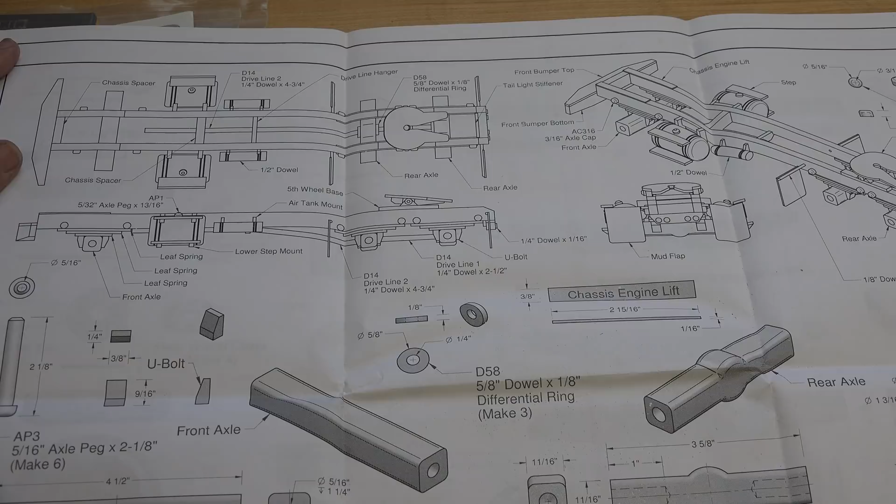Where last week we left off making those leaf springs, let's look at what we need to make now in order to be able to mount them to the frame. The way these drawings work, you really have to pay attention to what goes where and think about the process you're going to take in order to mount everything.

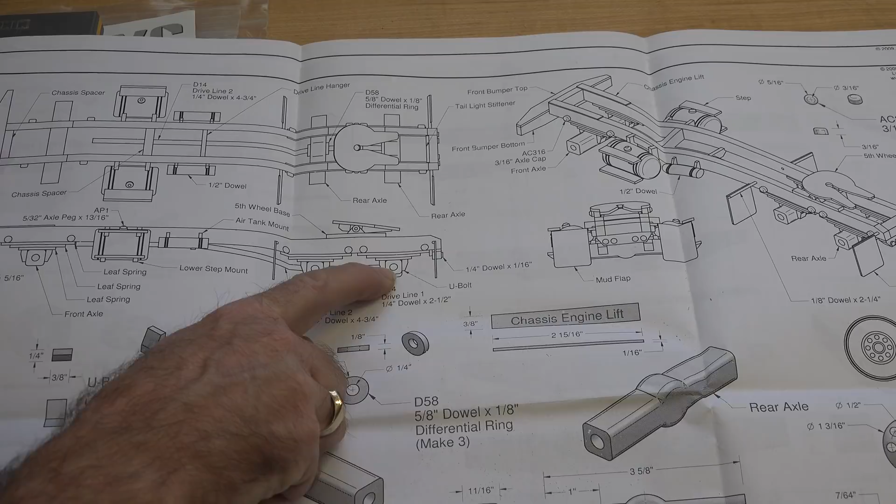We can see here our leaf springs here and here. It also shows them in another drawing over here. But we need to look at what connects everything together. Our leaf springs are glued to our frame, and our axles here are glued to our leaf springs.

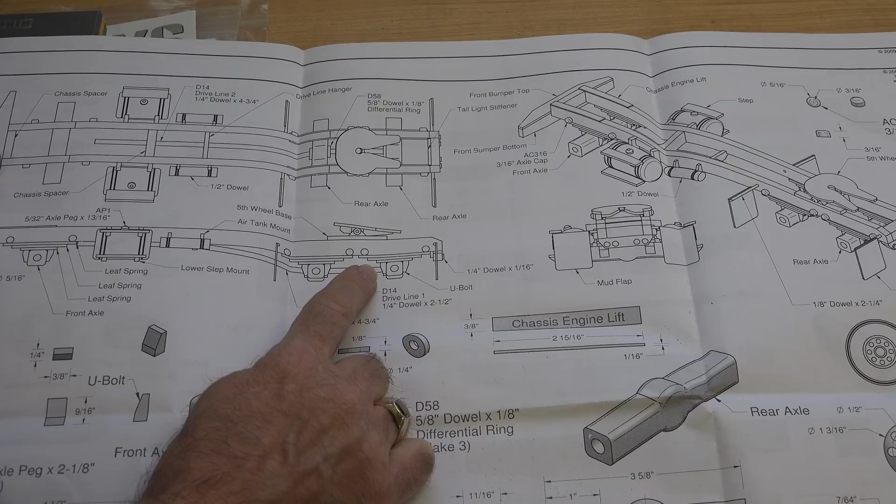In between our axles we have the drive lines, both the one between the two rear axles and the one that goes forward to the transmission. These drive lines are installed using our differential rings, so they will get mounted onto our rear axles. Now you see where everything is connecting here.

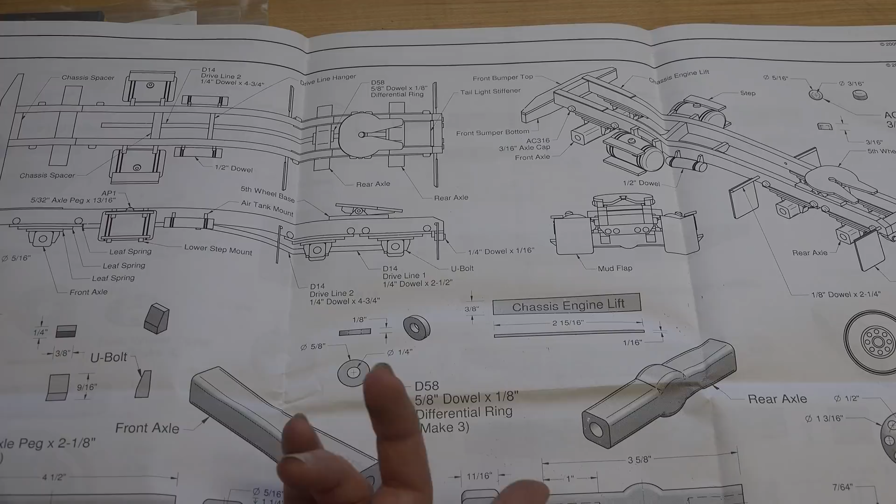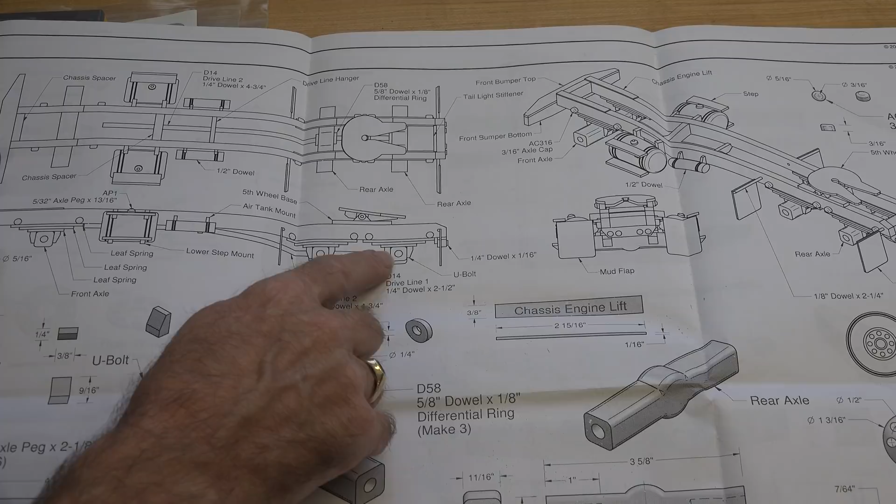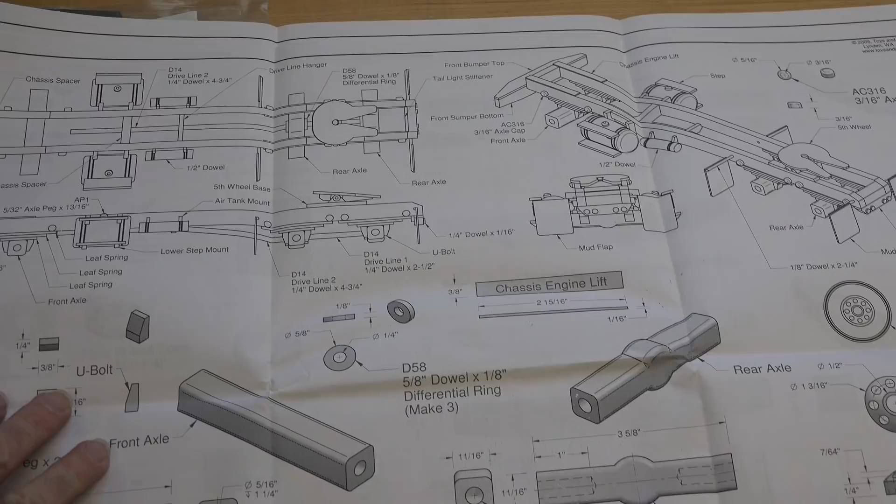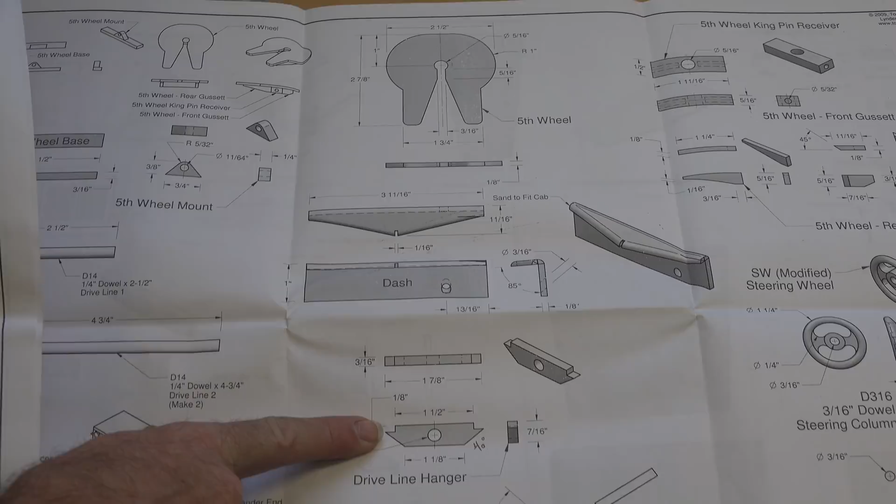If you were to just glue in all these pieces, you might have trouble getting in the drive line too. Even though you can't see it along this drawing, if you look up here's our front drive shaft that would go to our transmission, presumably over here. Right here is our driveline hanger, which we'll also need to get this driveline mounted in. That, when you flip through, is actually 2 more pages ahead right here with the driveline hanger.

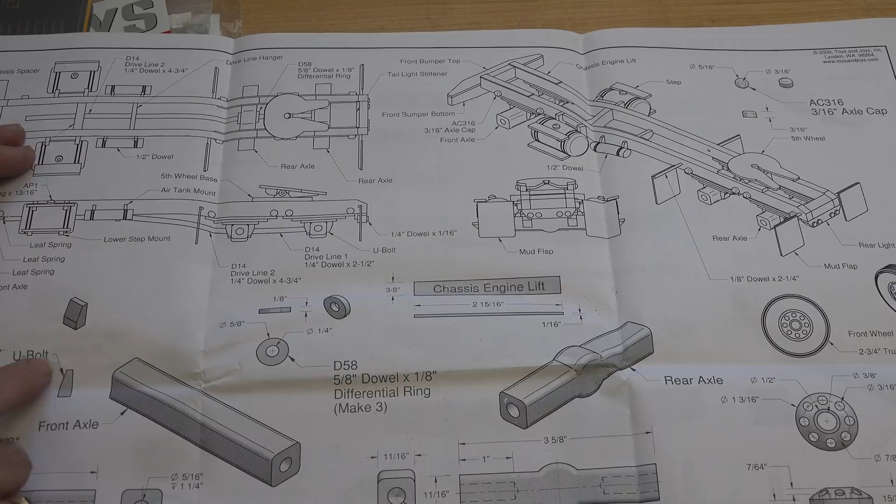So what we're going to need to make is the driveline hanger. We're going to need our 1/4 inch dowels for our drive lines and our driveline number 2 up here. We're going to need to make these U-bolts over here, which gets a little tricky, and I'll show you how to do that when we get there—the only tricky part is because they're so small. And we need to make these differential rings.

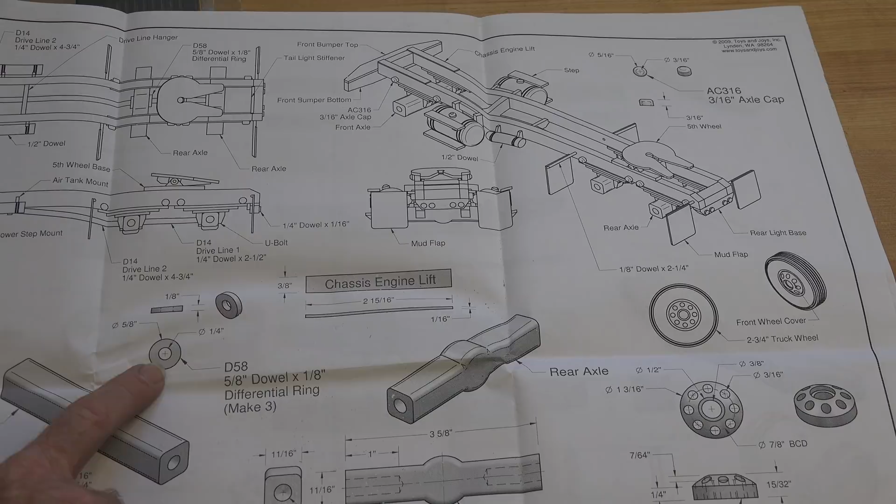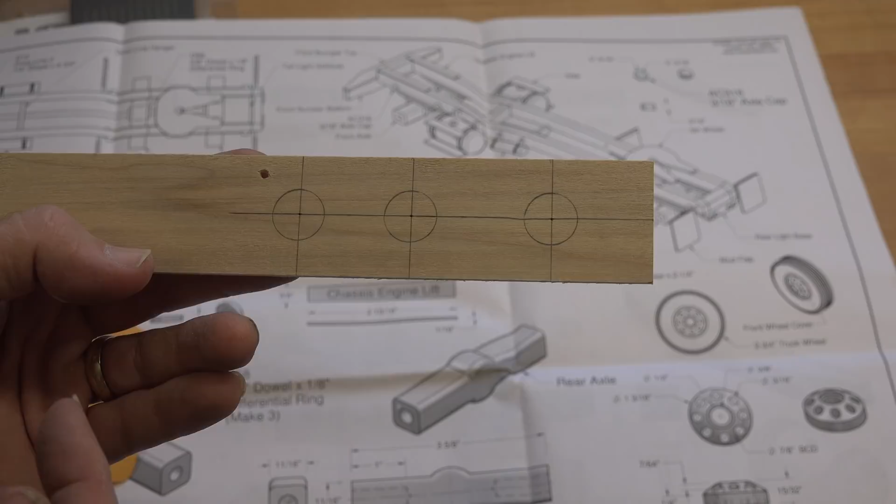So let's start off by making these differential rings. These pieces aren't rocket science. I've drawn out some crosshairs, used the circle template to draw a 5/8 outer diameter, and center punched the dead center of these crosshairs, and I'm going to drill a 1/4 inch hole as it says on the drawing. Then I'm going to cut the outer diameter on the scroll saw—I know it won't be perfect, so I'll cut just outside the line. Then we're going to do something to fix it up, and I'll show you that right now.

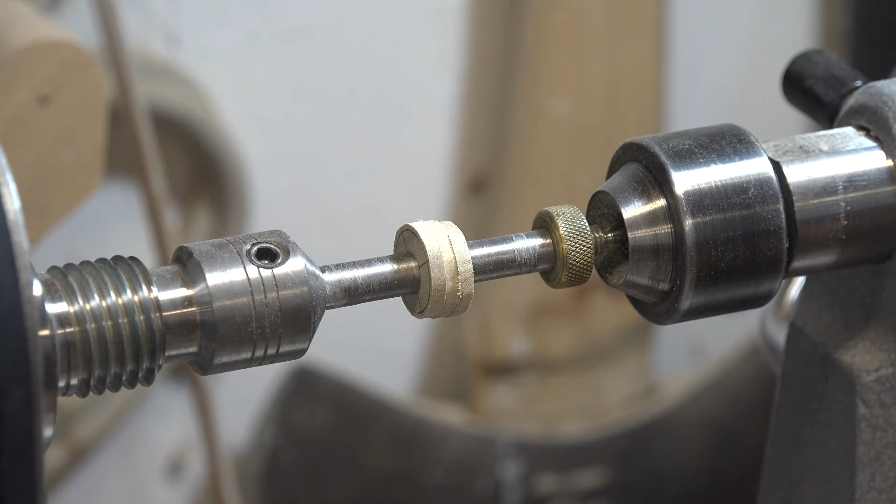We've got the 3 pieces rough cut, and isn't it convenient that that 1/4 inch hole in the middle also coincides with the diameter of my pen mandrel for my lathe. So we've chucked them all up here in the lathe, and all I'm going to do is take a piece of sandpaper, mount it to a little square block of MDF, and gently sand this square to the edges until I reach my 5/8 diameter. Now, if you don't have a lathe, don't fret, because a 1/4 inch dowel chucked up in your cordless drill will do the exact same thing. I just use this because it's what I have and what I like to do. So let's get these shaped down to our 5/8 of an inch.

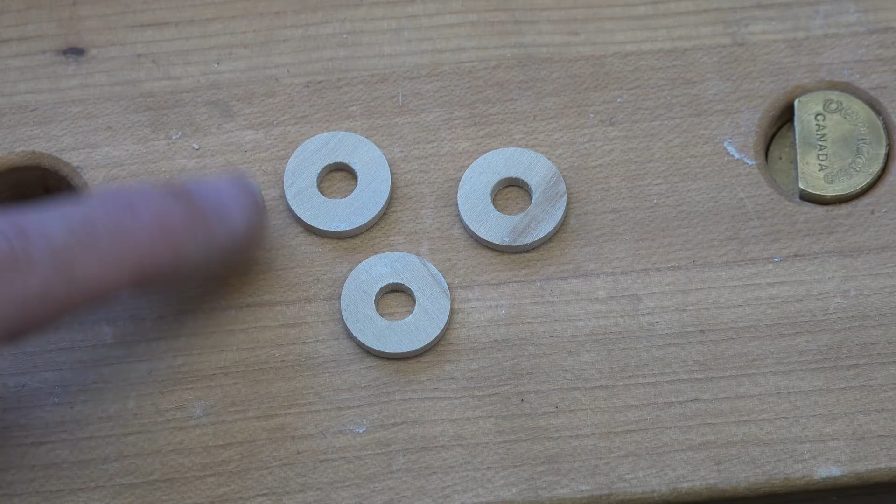And in no time at all, we have those 3 differential rings made, and you can see how nicely centered those 1/4 inch holes are. That's because that became the center which we spun them on the lathe and sanded them down to size. You'd get the same results with a cordless drill or even a drill press, guys. So those 3 parts are now made.

And we can now move forward, and I think we're going to make that drive shaft mount that was a couple pages ahead. And there we have the driveline hanger made, and you can see it's quite a small piece, and there's no kind of magic going on as to how to make this—it's just careful marking on your stock.

For this, I cut this particular dimension, the width of the piece, which is 7/16 of an inch, on the table saw using push pads, etc. And the rest of it is cut on a scroll saw.

Drill the hole in the middle with a 1/4 inch brad point drill bit while the stock is still square, to make sure you have plenty of original stock to work with and you're not trying to drill into this tiny little piece. And that's it, guys.

It's not rocket science, it's just a different method of making these pieces. Just take your time and everything works out just fine. If you're not that good on a scroll saw and you can't get that sharp edge, no problem. Cut outside the line and use that sandpaper mounted to the 3/4 inch MDF, and sand up to the line to square everything off and make it nice and straight. And Incra T rules, which you guys have seen featured on my show on more than one occasion, are really your best buddy when marking this sort of stuff out.

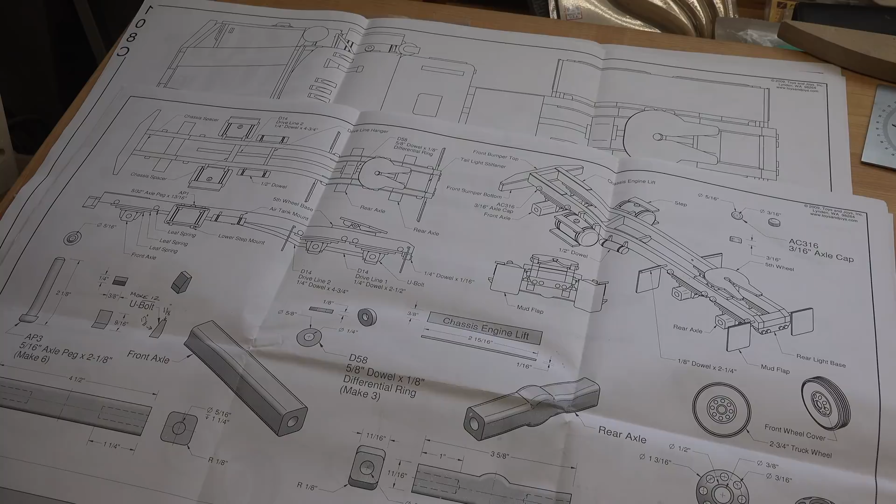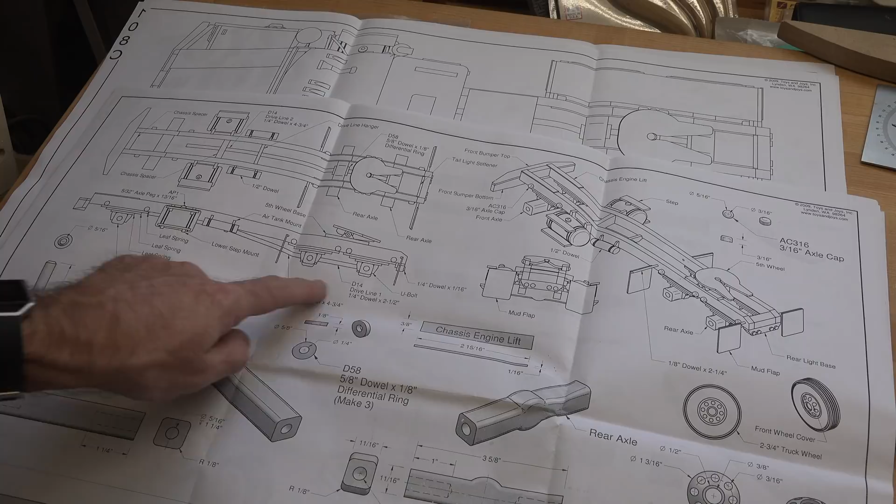Here is the problem. As I said in part 1, I have never seen one of these plans yet where things or measurements were not missing, but I've always been able to figure it out, and this one is no exception. Showing the position of the axles here, they show them over here, they show them up here. You can see the leaf springs right here, and then there's a gap between them, but nowhere in any page of these plans can I find any measurements as to where to mount these or where to mount the front ones. So now we're going to get into a bit of confusion.

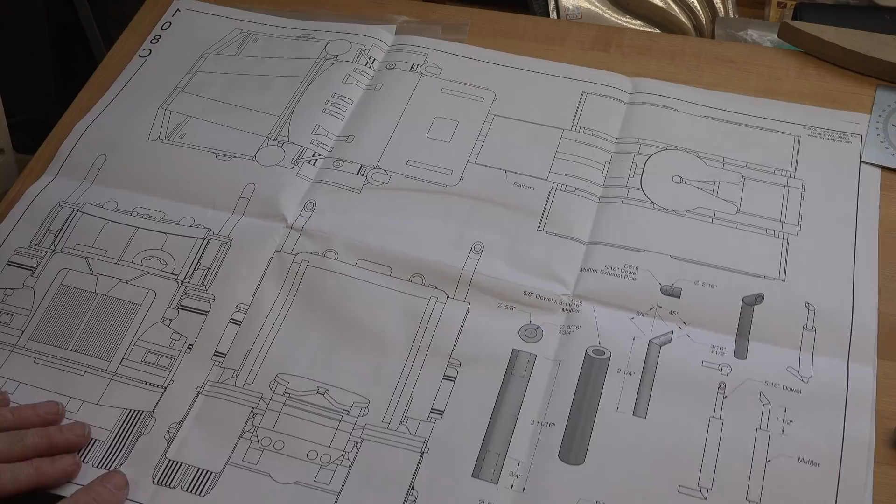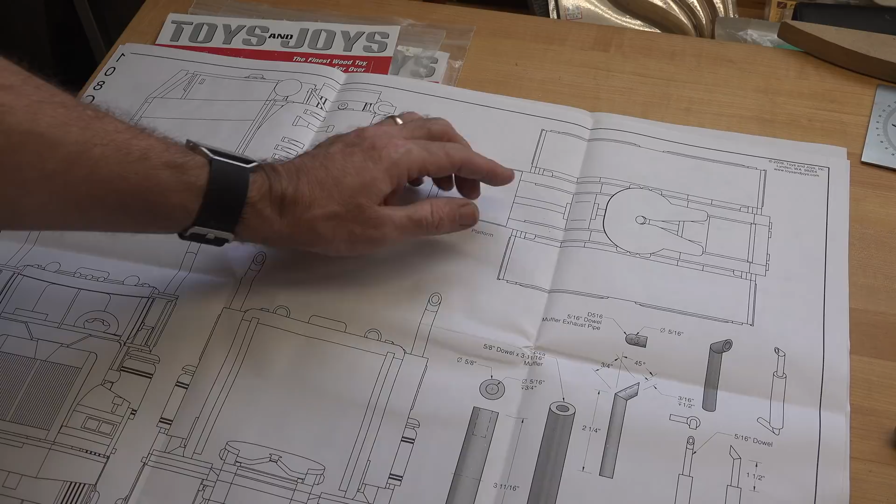I did say that these are a 1-to-1 scale plan so that you can take measurements. So I ended up shifting over all the way to page 9 of 9, the last page of the plans. If we look between the fenders and the frame right in here, we can see our axle, which is right here, and our very rear axle, which is right here. We can take measurements at this point from the back of the frame, right here at the cross member section, to the center of this axle and then to the center of this one. We will have to place center marks on each one of those pieces, but we will be able to reference that and get a measurement.

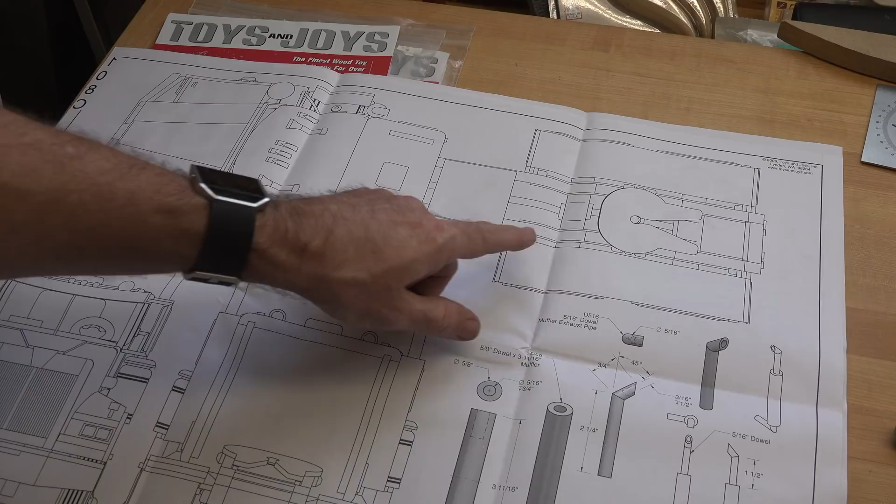I'm not going to give you that measurement. If you guys are doing these plans, you can scale it off and figure it out. That's part of the fun and part of the enjoyment of doing these, is figuring out problems.

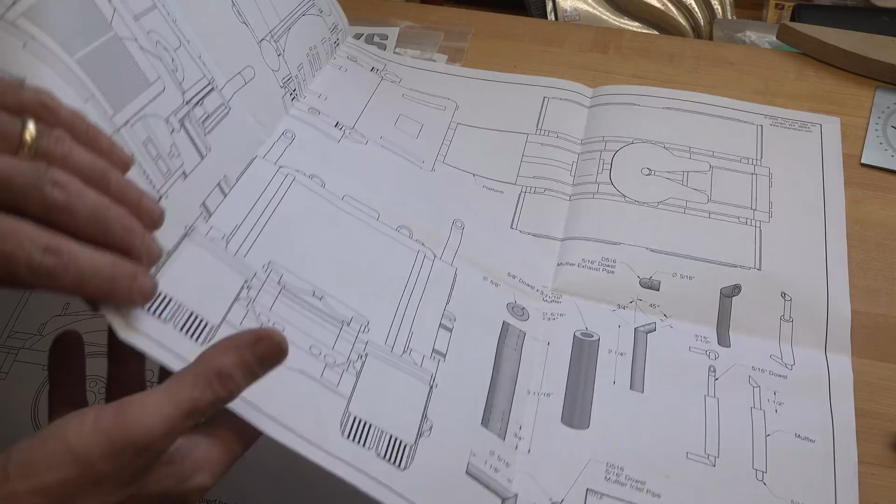Now, how about the front? We have nothing to measure off here, and again, no measurement to be found. However, if we go all the way to page 1, the very first cover page of this entire thing, we can scale a measurement to the center of this hub right here. So we would be able to take a measurement from the center of this wheel all the way to the center of this hub here of this wheel, and that would give us the measurement of the center of the axle for the front wheels. It's the only way I could figure out to do these measurements, and the only place I could find any reference point to get it.

So if you're following along and you're using these plans and you're confused now and have no idea how to mount them, I've just given you the way that you could scale off these prints and mount these parts. So I'm going to do the dry fit, and once I get it all sat in place and dry fitted, I'll come back and show you what we're looking at before I glue it into place.

Using center lines and scaling from the drawing, we have a dry fit of our rear axles and our leaf springs. The U-bolts are in there as well, but they're just sat there, as is everything else. We still need to mount these rings, which will go at the inside edge of each of these differential pieces with the drive shaft going between.

And then for the front drive shaft here, of course, another ring here with our bracket mounted further up along the line to hold that longer piece of drive shaft all the way to the front. Not that big of a deal.

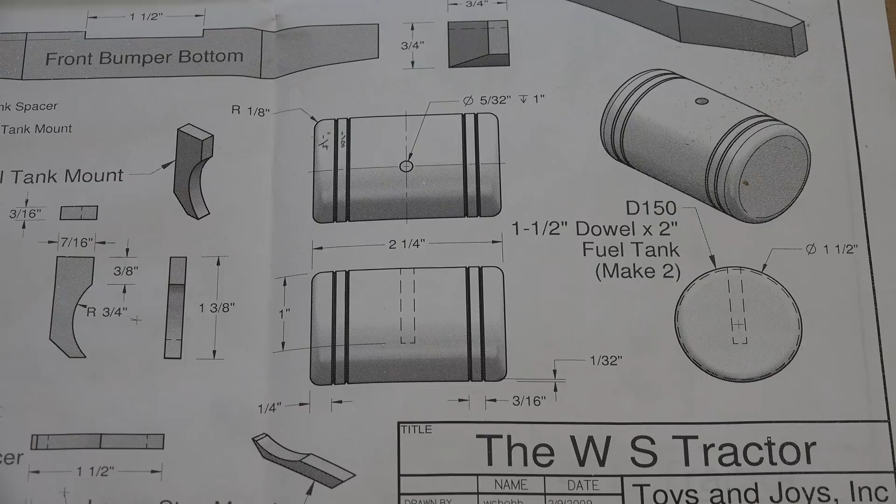Following over on page 3 of the plans, we're going to move on and start making some of the other pieces to mount on this frame. And where I'm going to start is with the fuel tanks.

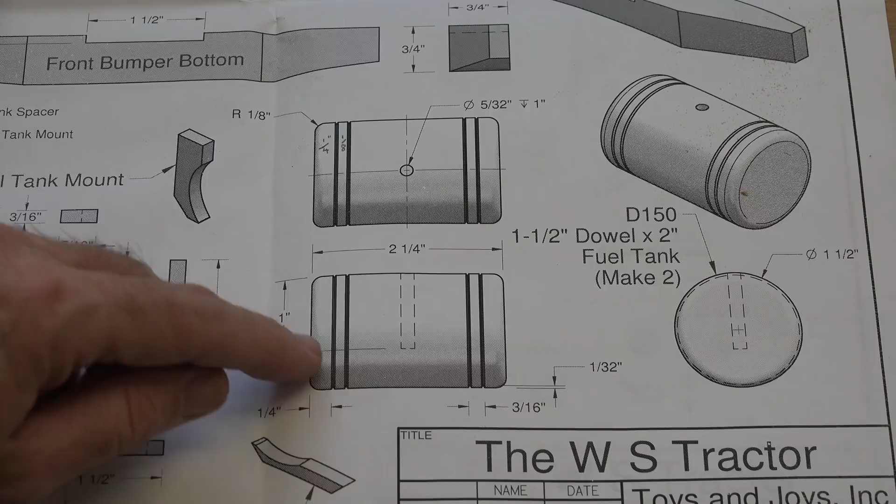Now, they're calling for a 1.5-inch dowel, but I really don't like using any store-bought product on these builds. So I will actually be taking a piece of stock over to the lathe and turning it till it's 1.5 inches in diameter, and I will be cutting it to the lengths that we have here. I'll be using a parting tool to place these grooves in the fuel tank, and then afterwards we're going to drill the holes in it that we need for the filler cap.

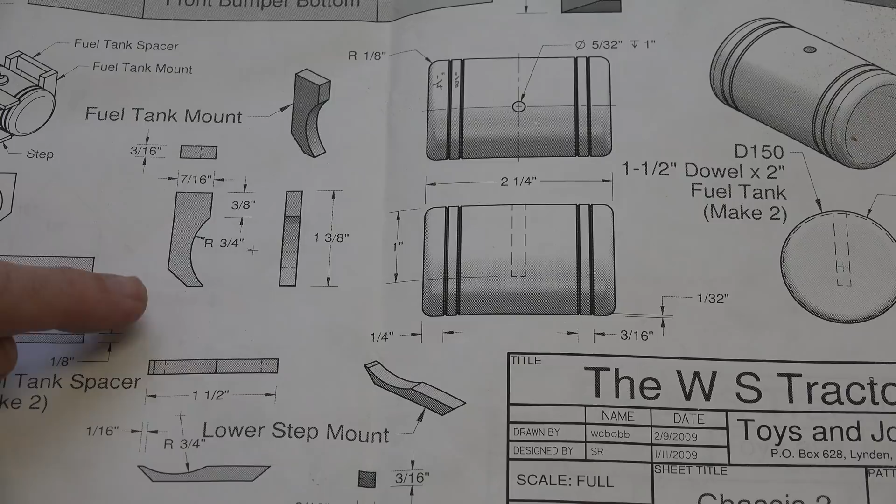As well, we can see that there are some mounting pieces that need to be made here, and it's not a difficult process to make these. What I will be doing is transferring these particular patterns by photocopy and then spray adhesive onto a piece of stock, and these will all be cut at the scroll saw.

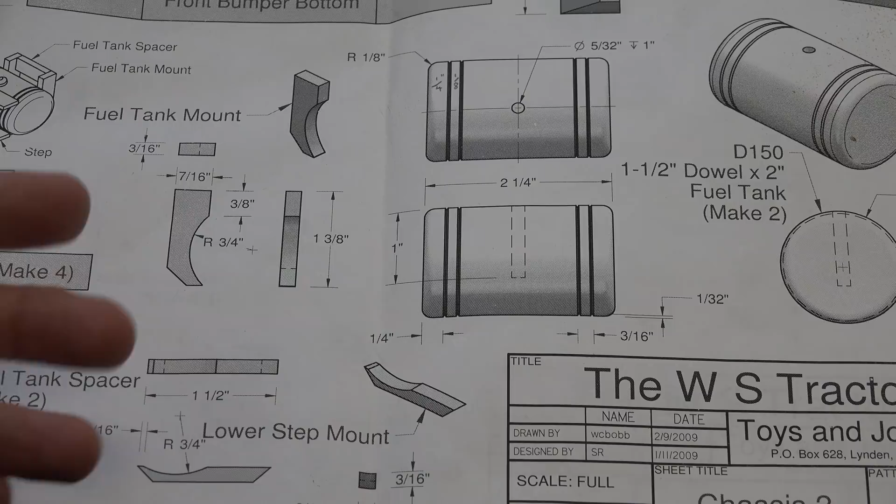Once all of the pieces are done for the fuel tank, I will be mounting those to the frame, and that's where you will join me next, is when we're mounting those to the frame.

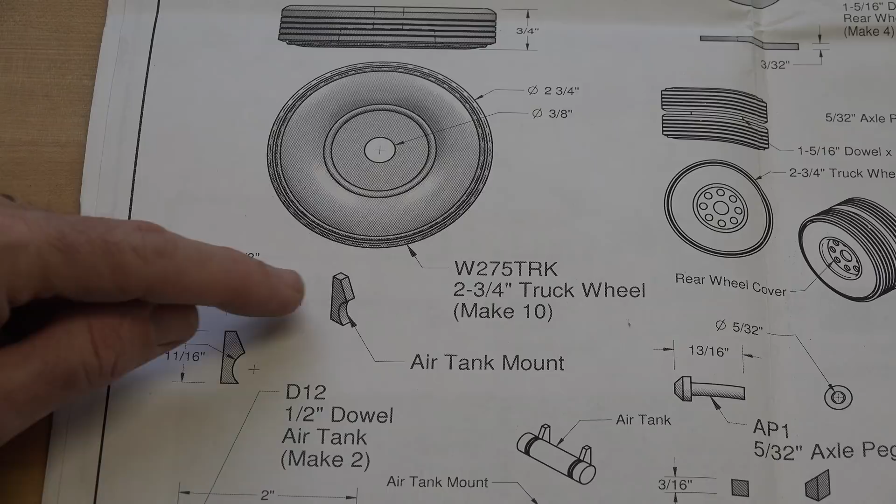As well, while I'm already at the lathe, I will be making the air tanks as well, which in this case, it looks like they are a 1/2 inch diameter turning. So I will be turning these at the lathe as well, and also making the mounting brackets for them at the scroll saw. So in just a little bit, I'll see you back here.

This stuff isn't rocket science. It's not difficult to turn these little pieces here. You really don't need a video on how to do it, but we will come back and I'll show you how to get the measurements to transpose these and get them mounted onto your frame. Well, here are the pieces turned.

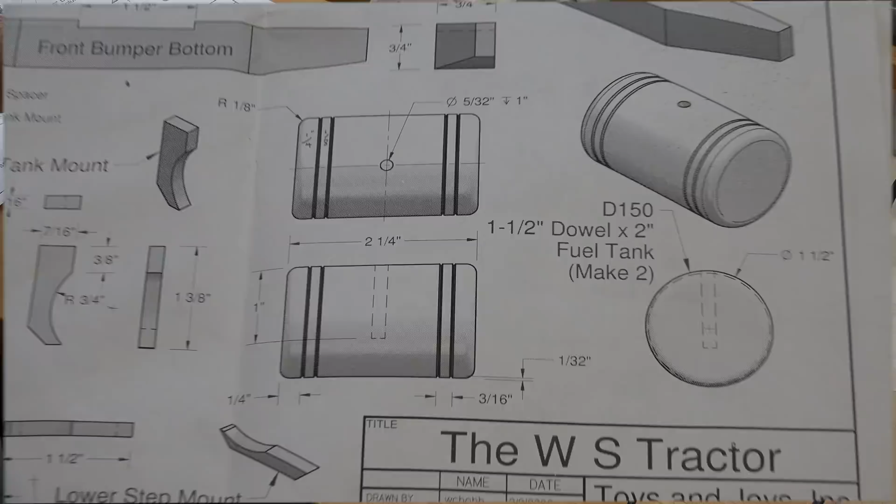We have the 2 fuel tanks and 2 air tanks, and I've also turned these fuel caps here. In the plans they actually call for axle pegs, but like I said, I try not to use any store-bought parts in the build. I prefer to build my own.

Now it's time to cut the brackets for our fuel tanks, and for that I'm going to stack cut them. I have one pattern attached here to the top of this piece of 3/16 maple, and I'm going to use some hot glue to glue 4 of these together. Once I get them glued together, I have the center punch here punched out so I can use a 1.5 inch Forstner bit, and I'll drill down to get the perfect circle right there.

You don't have to do that, you can cut them freehand. They'll fit just fine, but I kind of like to do it this way. Then from there, I'll cut the rest on a scroll saw, and then we can put those brackets together.

Now, something I want to point out - if you're going to turn your own pieces, you want to be careful when measuring and marking them out, because otherwise you end up with something like this. This is a failed piece, because the guy on the lathe didn't measure well enough, and ended up with one that was too short and had to turn a second one. So just something to keep in mind - measure twice, cut once, or as the saying goes, darn it, I cut it twice and it's still too short.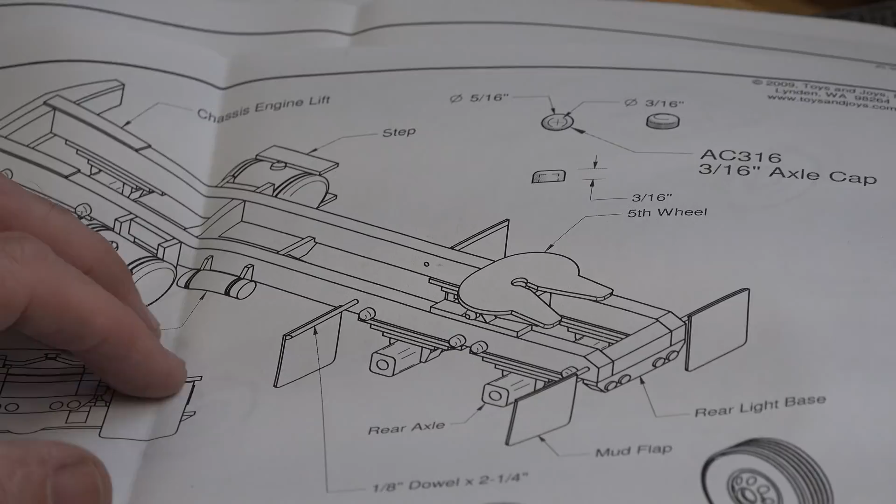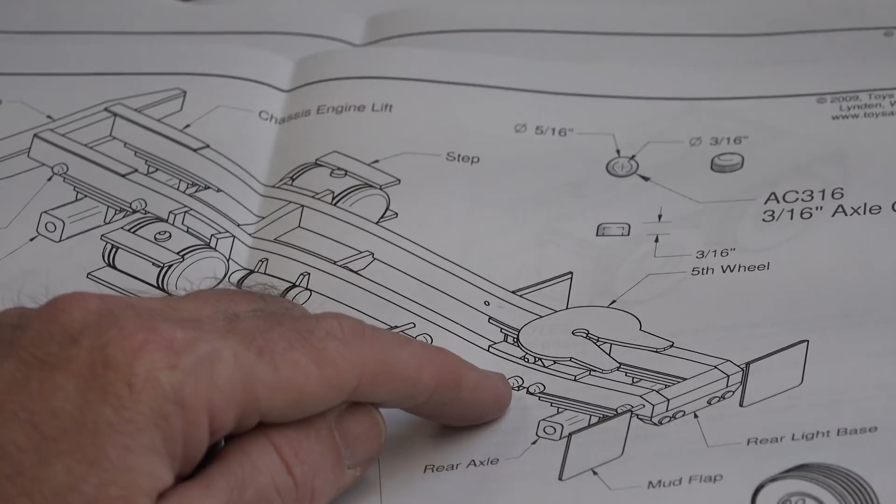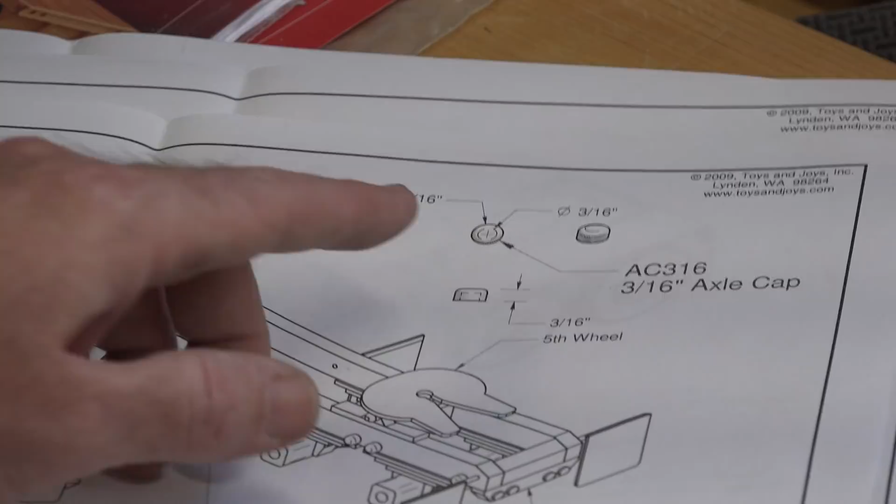I know I said I'd like to start on this 5th wheel assembly, but I think there's a few other small parts we can make first, starting with these little nubs that will represent the bolts holding the brackets for the leaf spring assemblies. They call for a 3/16 inch axle cap, but as I said before, I don't like to buy pre-made parts, so we're going to make our own. I'd also like to do these steps on the tank and get those out of the way, so most of the frame assembly is completed.

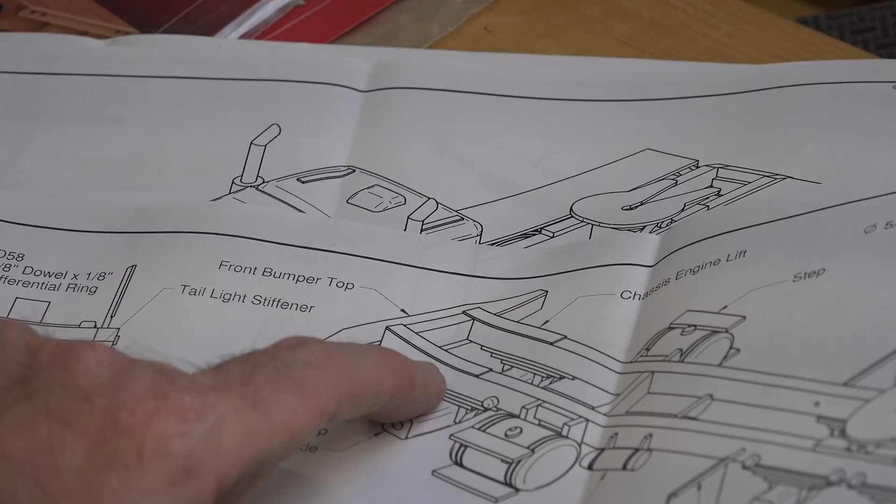There's also a chassis engine lift piece that glues onto the front of our frame, and it's just a square piece, so you don't need any kind of video on how to do that. The way to make these brackets is the exact same process as the brackets we made for the tank, so that's no different either.

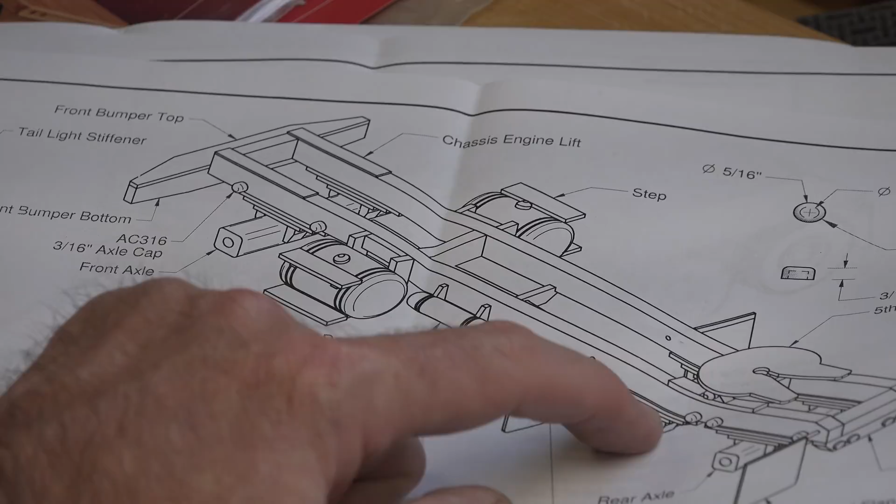But to make these little nubs for our leaf springs, it's a bit of a different process, so I'll show you how I make them and you can decide what you want to do. Instead of using the axle caps, it's a simple process of chucking up a 5/16 inch dowel into a cordless drill, turning the drill on, and sanding the end to give it a rounded profile.

It doesn't have to be super rounded, just enough to take off that sharp edge. Then, using that same process I showed you for cutting small parts with the small parts cutting jig, I take it over to the table saw and lop off 3/16 of an inch for our piece. For this we need 12 of them. So that's the process: round off the end, cut it off. Just remember to keep your dowels long enough so your fingers aren't too close to the table saw blade.